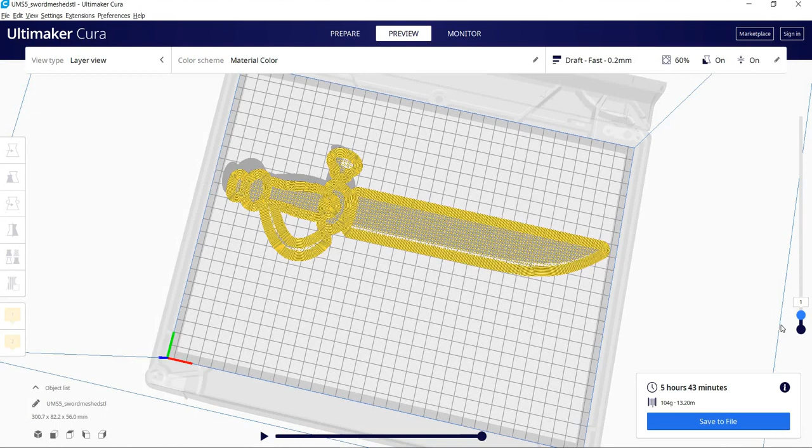This is my DIY assignment 2. In this, I would be showing the 3D model of Jack Sparrow sword and its G-code generation. So this is the final model of the Captain Jack Sparrow sword. And firstly, I would be showing how I created this. And secondly, I would show the preview of the 3D printing of the sword in the software Ultimaker Cura.

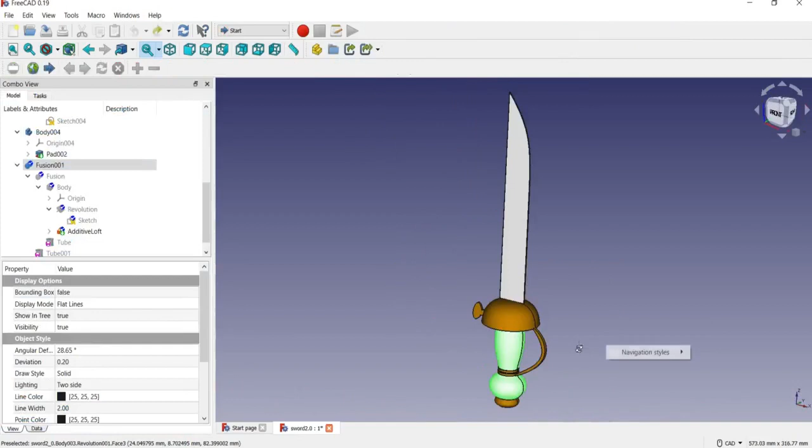So first I made this handle using the revolve feature. I created the outline sketch using B-spline curve and radius of curvature lines. And then I revolved this to make this handle. Then I added this padded part below the handle using the loft feature. I created one circle here, and lofted the 3 circles to complete the handle part.

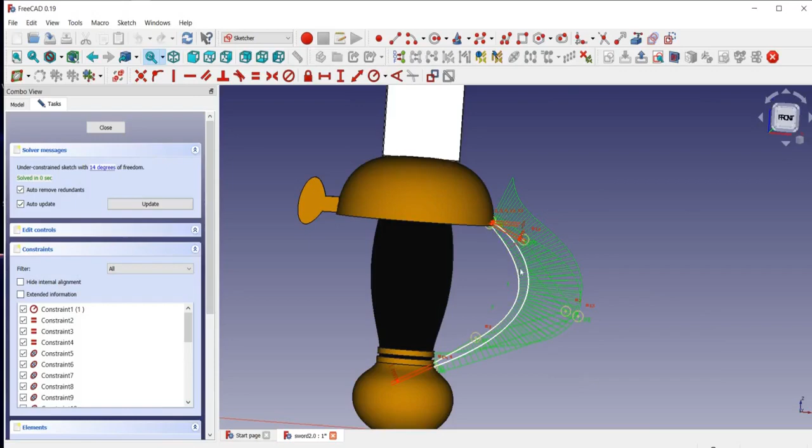Next I added 2 cylinders here and here for the grooving slope in the handle. I created the outline sketch of the support of the handle and then padded it up to make this side support of the handle. Next I created this sketch and revolved it to form this highlighted part.

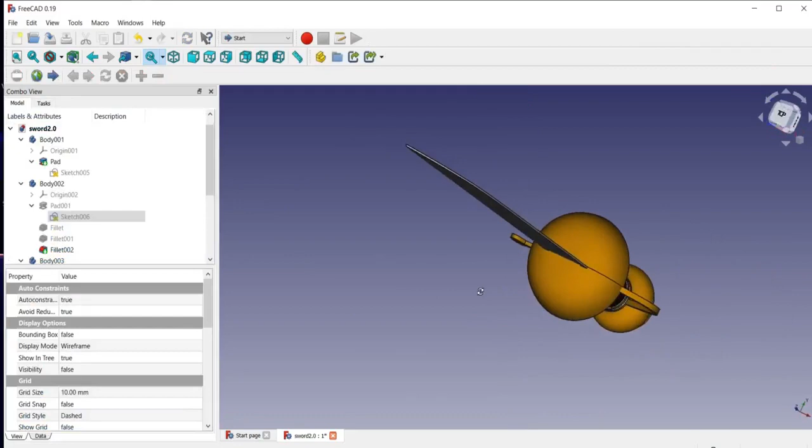Finally, to create the blade of the sword, I created a line here and used a B-spline curve here to make this outline sketch and then padded it to a very minimum height, that is 0.1 or 0.5 mm. Finally, I added this part by creating the outline sketch and padding it to give this. So finally the sword is ready, and next I colored it like the Jack Sparrow sword.

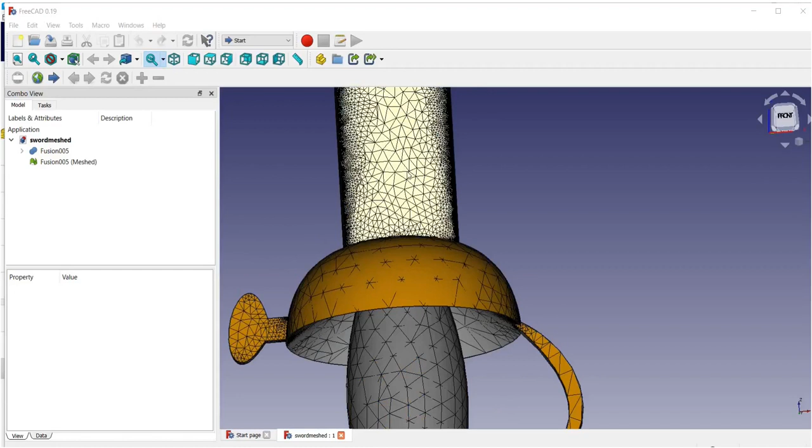So then I created the meshed form of the sword, and the meshes look like this, triangular in shape. And now since the sword was ready for 3D printing, I saved the STL form of this meshed form of the sword, imported it to Ultimaker Cura, laid it flat, and on the predefined settings, the slice time was showing as 1 day 13 hours, which is quite a long time.

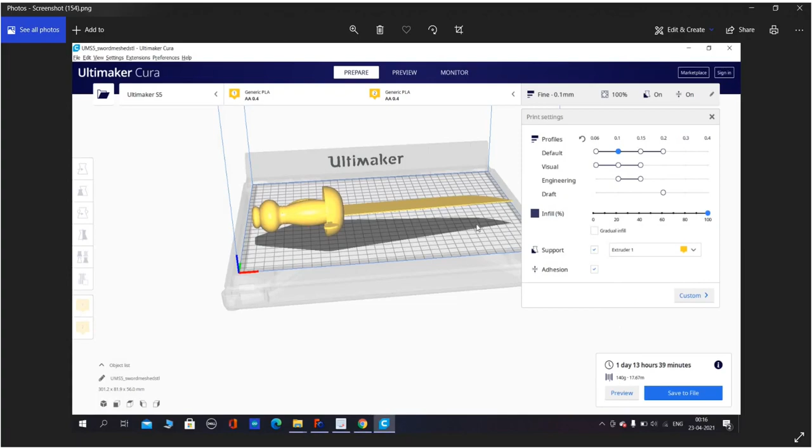So then I transformed a few of the settings, thus reducing the time to 5 hours 39 minutes, which is relatively very low compared to that. For doing so, I decreased the infill density to 60%, changed the profile from 0.1 to 0.2, that is a faster version, and allowed a draft version of this sword, which is like a prototype.

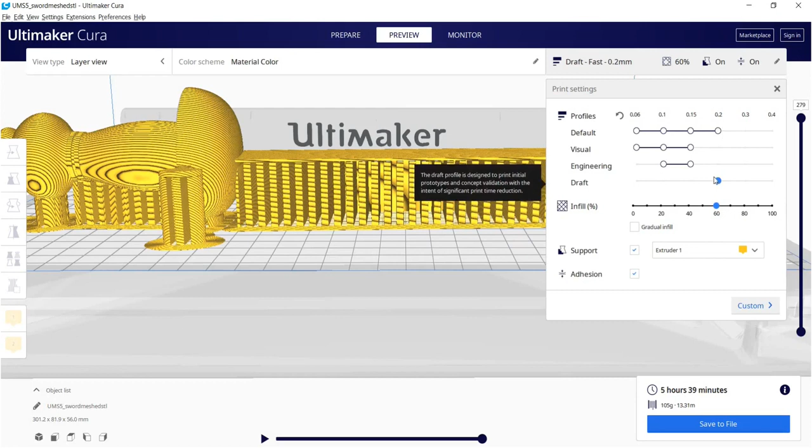So now we can see at different time steps how the sword is created using supports for the overhanging parts of the sword. Thus finally taking 5 hours 39 minutes and 105 grams of the material.